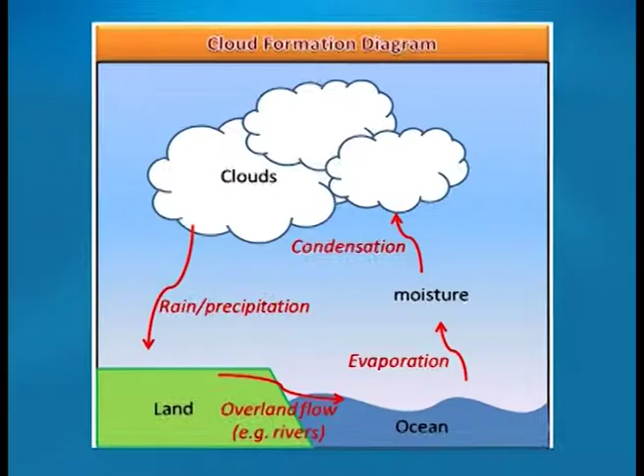Hydropower is a renewable energy resource because it uses the Earth's water cycle to generate electricity. Water evaporates from the Earth's surface, forms clouds, precipitates back to Earth, and flows towards the ocean. The movement of water as it flows downstream creates kinetic energy that can be converted into electricity.

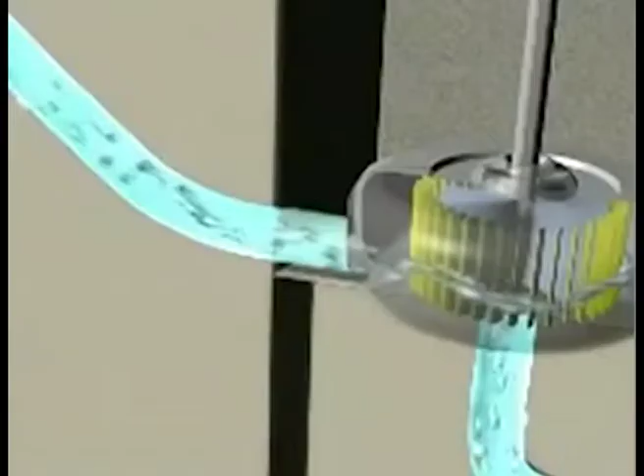On a worldwide standpoint, it is the most widely used form of renewable energy. Hydropower has been used for centuries by humans. The electricity is typically created when the water is passed over large mechanical turbines. The water pressure forces the turbines to turn. The mechanical energy created is then converted into electricity.

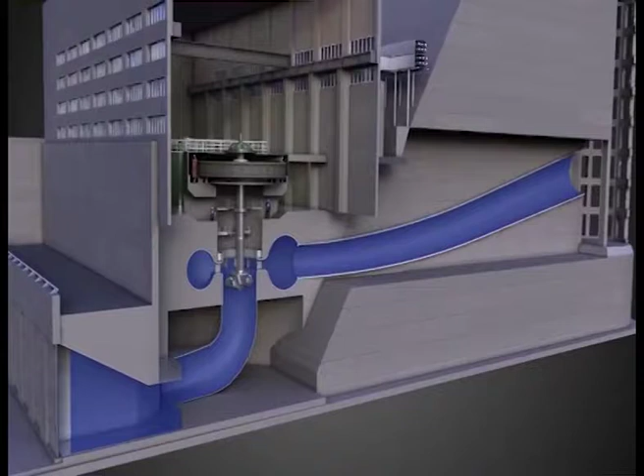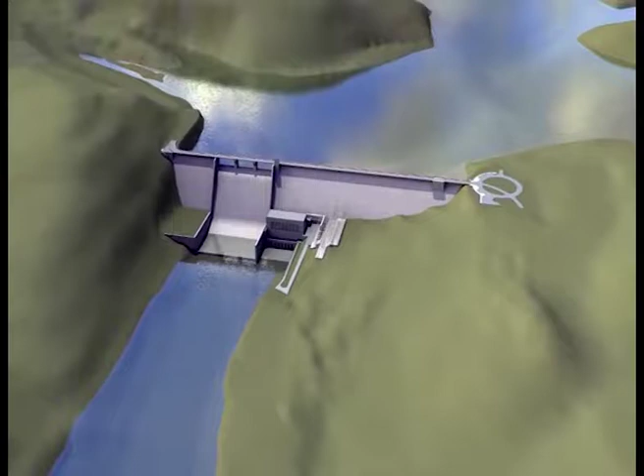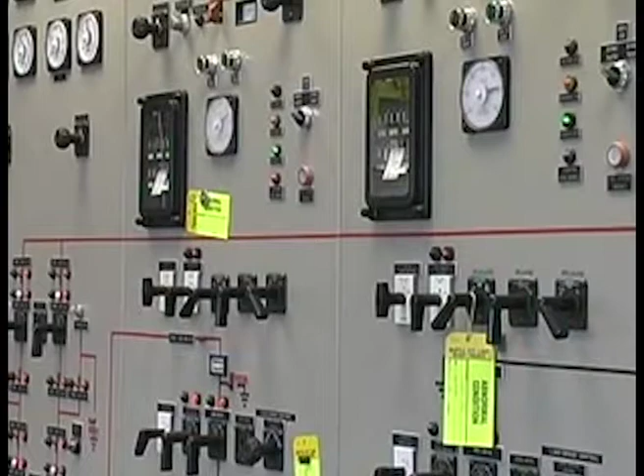Hydropower has now become the best source of electricity on Earth. History proves that the cost of this electricity remains constant over the years. Because of the many advantages, most countries now have hydropower as a major source of electricity. The government has taken a number of initiatives in recent years to improve the functioning of the power sector and attract investment. There has also been a special emphasis on accelerated hydropower development.

The following aspects are highlighted in this lesson. Future prospects of hydroelectric power in India. Advantages and disadvantages of hydroelectric power plant.

Policy, future plans. The National Electricity Policy (NEP) aimed to achieve the following by 2012. Per capita electricity available of 1000 units, installed capacity over 2 lakh megawatts, inter-region transmission capacity of 37,000 megawatts, spinning reserves of 5%, minimum lifeline consumption of 1 unit per household per day. Quality and reliable power.

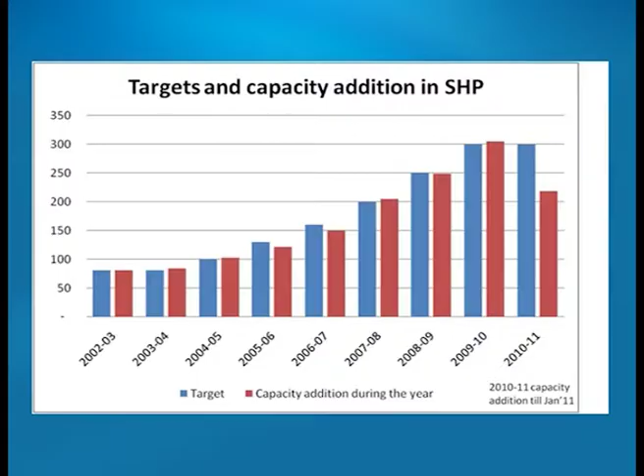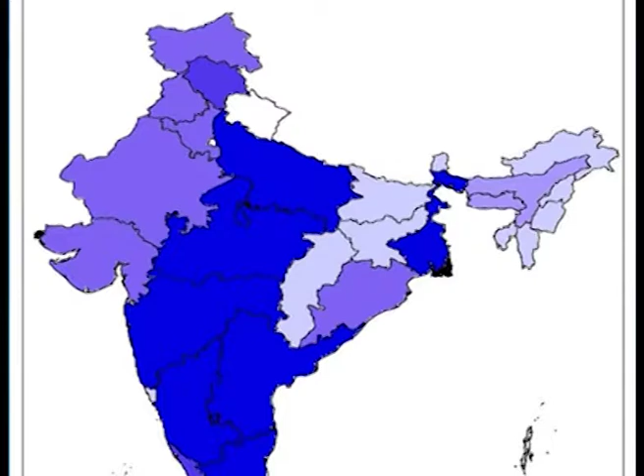Strategies for accelerated hydropower development. To name a few initiatives: policy liberalization, ranking of potential hydro sites, the Prime Minister's 50,000 megawatt hydroelectric initiative, streamlining of clearance procedures, institutional and budgetary support. The government has also taken a pragmatic view that in the immediate future, the public sector would have to play a dominant role in developing hydropower.

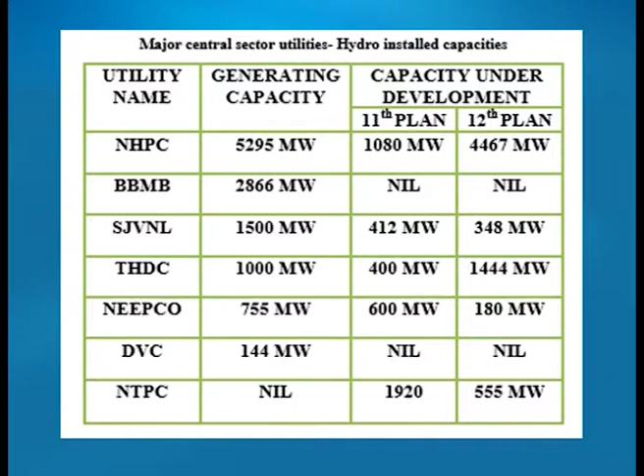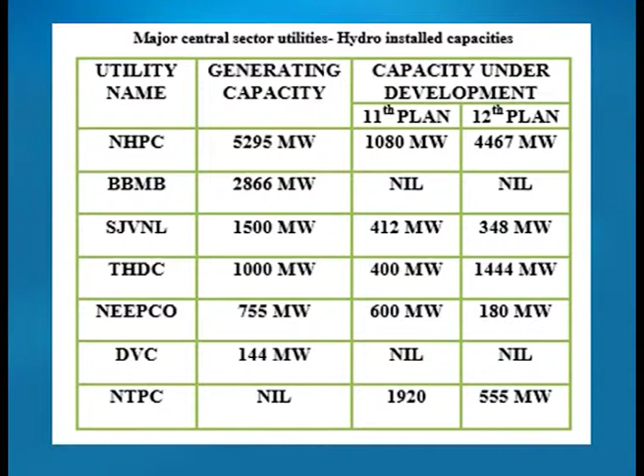A number of hydropower corporations have also been established in the central sector and in the joint sector, central and state. This includes the NHPC, North Eastern Electric Power Corporation (NEEPCO), Nathpa Jhakri Power Corporation (NJPC), now Satluj Jal Vidyut Nigam Limited (SJVNL), and Tehri Hydro Development Corporation (THDC). Besides, the National Thermal Power Corporation (NTPC) has been authorized to take up hydro projects.

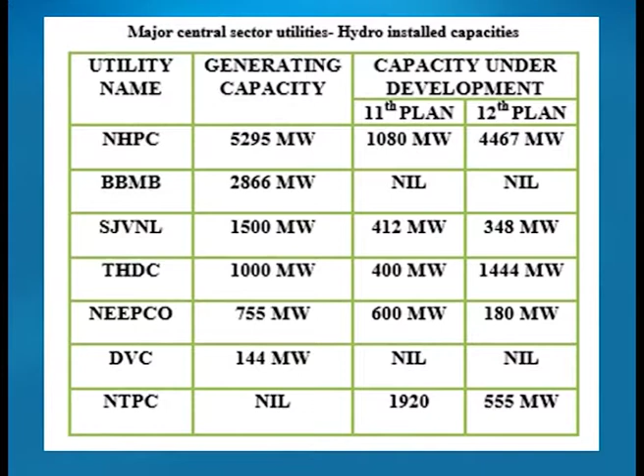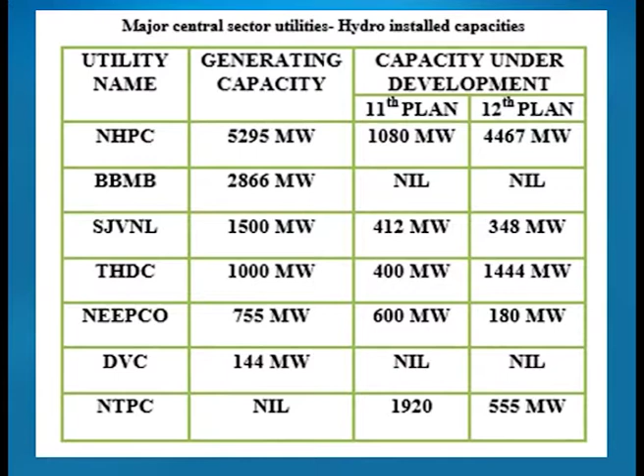Narmada Hydro Development Corporation (NHDC), a joint venture of the National Hydroelectric Power Corporation (NHPC) and the Government of Madhya Pradesh, has been constituted to implement the Indira Sagar 1000 megawatt and Omkareshwar 520 megawatt projects.

Status of water resources projects in India. In the Peninsula, hydro and water resources development is reasonably good. The Himalayan region has the bulk of the potential to be tapped. The Himalayas, being geologically young formations with frequent changes in rock conditions, are known for throwing up surprises. Geological surprises are one of the main causes of time and cost overrun and affect resources development.

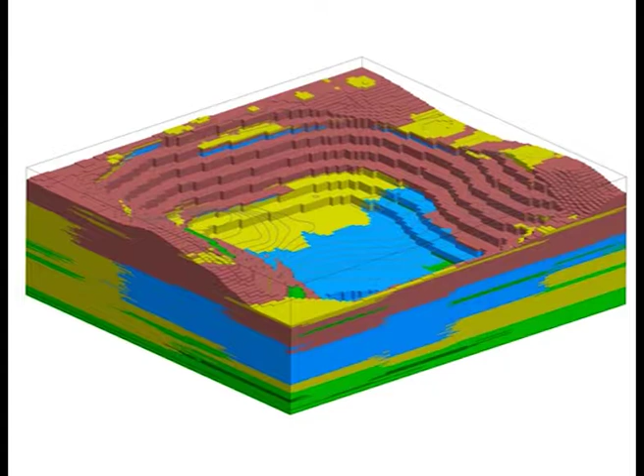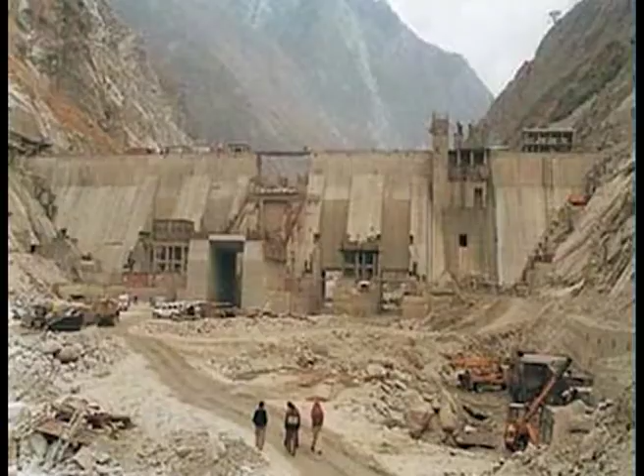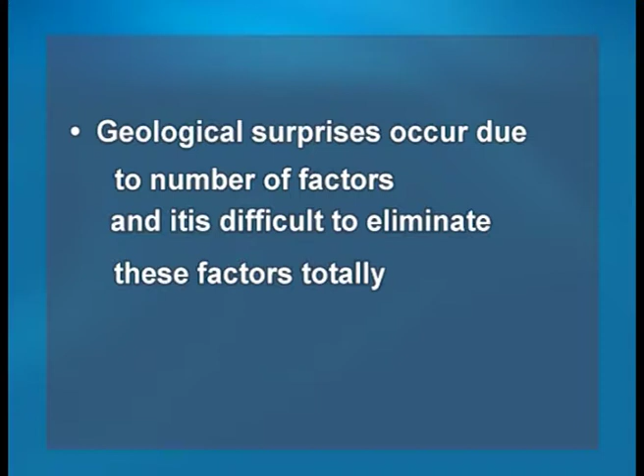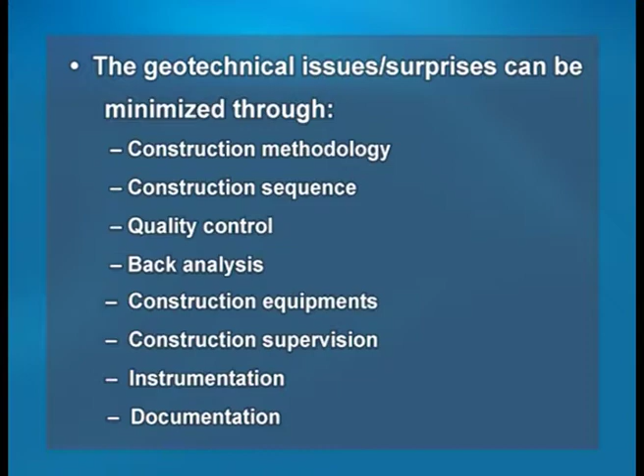Remedial measures to geotechnical issues. Geotechnical surprises occur due to a number of factors and it is difficult to eliminate these factors totally. However, this could be minimized by adopting suitable means during the planning stage, investigation stage, and design stage. The geotechnical issues or surprises can be minimized through construction methodology, construction equipment, construction sequence, construction supervision, quality control, instrumentation, back analysis, and documentation.

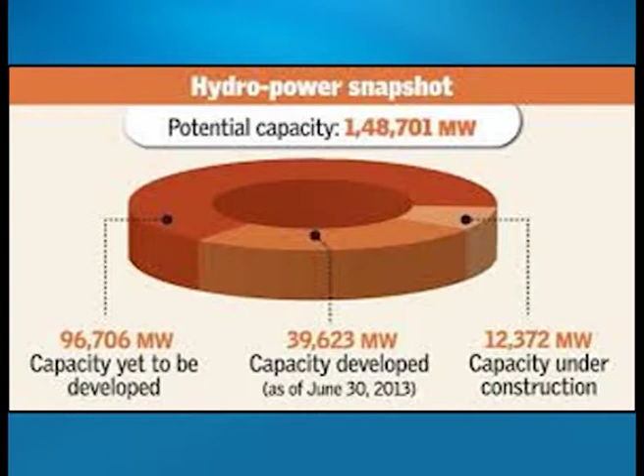Advantages. Hydropower is self-contained power with all its necessary elements inbound. It does not depend upon outside sources for supply of primary energy for consumption. India is blessed with an immense amount of hydroelectric potential and ranks 5th in terms of exploitable hydro potential on the global scenario. Hydropower potential is assessed at 1,48,700 megawatts, out of which the bulk potential is still to be harnessed. Pump storage potential is assessed at 93,920 megawatts.

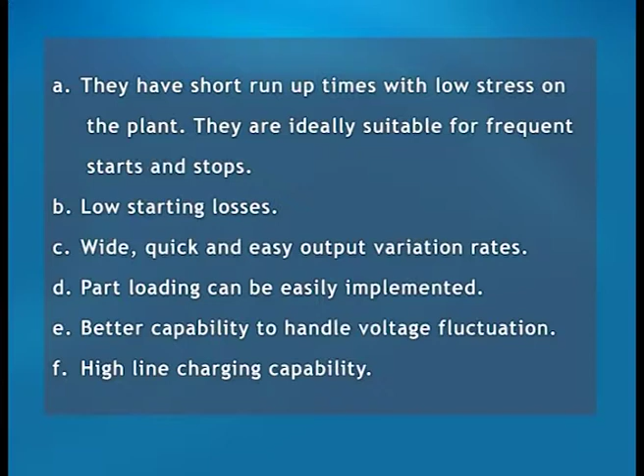Hydropower, due to its versatile operating characteristics and prominent technical features as mentioned below, is a favorable option. They have short run-up times with low stress on the plant. They are ideally suitable for frequent starts and stops. Low starting losses, wide, quick and easy output variation rates, part loading can be easily implemented, better capability to handle voltage fluctuation, high line charging capability.

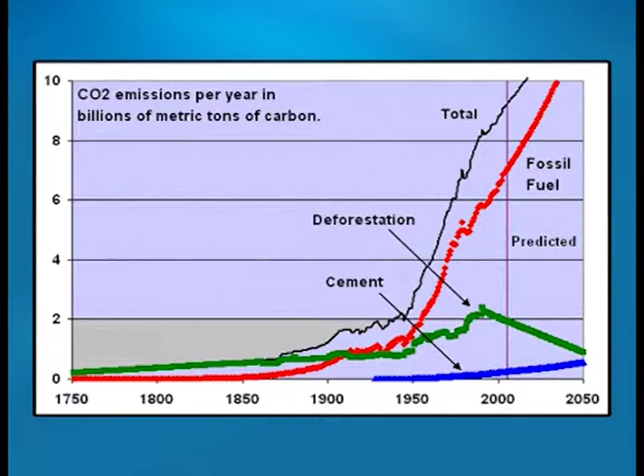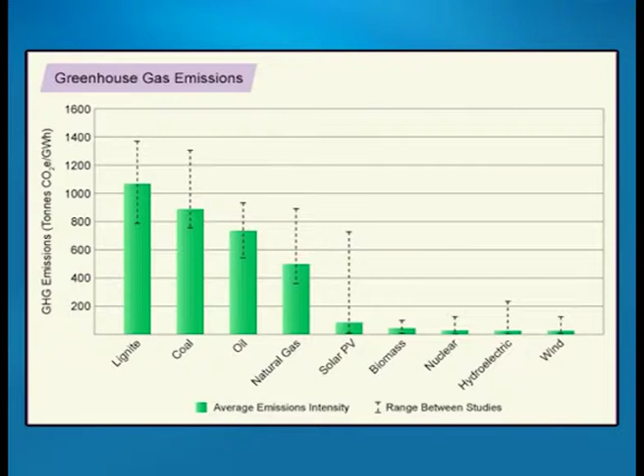Besides being inexhaustible, it is pollution free and non-inflammable in character. It helps in infrastructure development of remote and hilly areas. In this age of ozone depletion and global warming, we have to look up to hydropower as the energy source of the future. World over, the recent concern has been the increasing amount of CO2 in the Earth's atmosphere due to excessive burning of fossil fuels, and to curb this emission, we must switch over from fossil fuel based energy to clean hydropower.

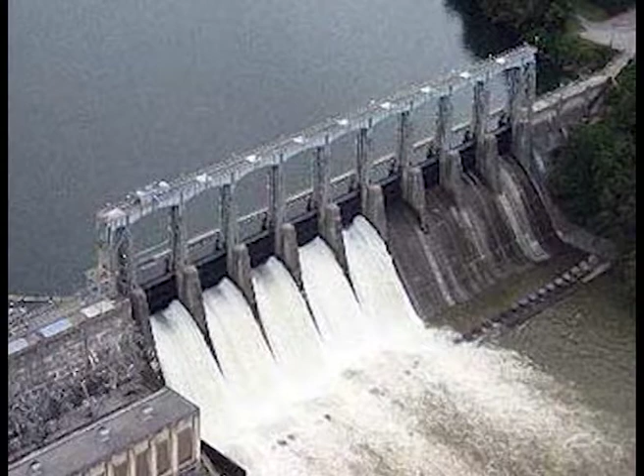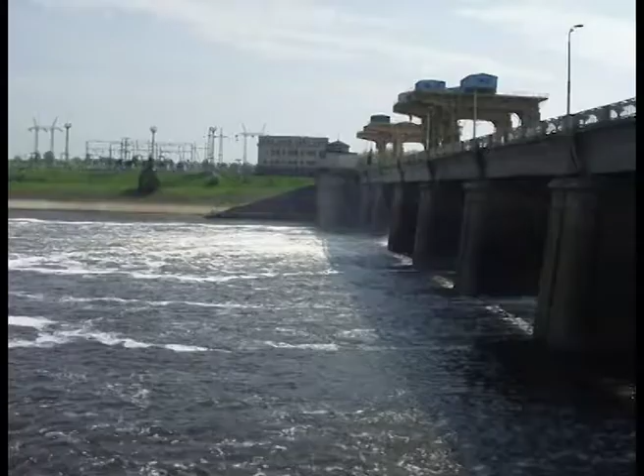There are several other technical advantages vis-a-vis other conventional forms of energy. Renewable source. Hydropower is a renewable source of energy, whereas for generation of 1000 GWh of electricity by a thermal station, 0.7 million tons of coal is required to be mined, transported and burned. It is a non-polluting source of energy with high conversion efficiency and does not contribute to the greenhouse effect, whereas for every billion units of thermal generation, 1 million tons of CO2 is released into the atmosphere.

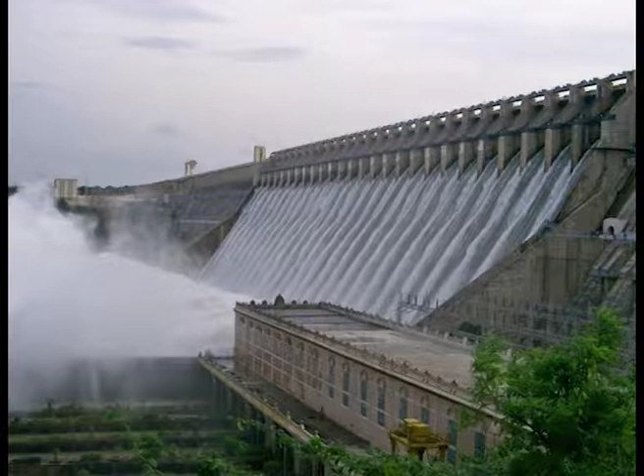Conversion efficiency of a thermal plant is also about 40% as against 85% for hydro, which means that for every 1 million units actually generated, 1.5 million units are being wasted.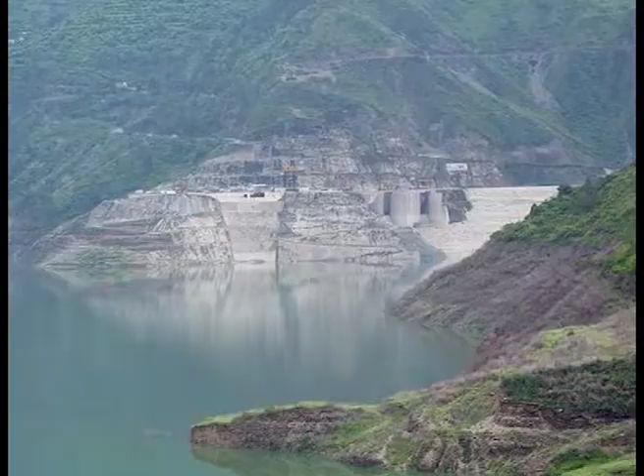Multipurposes. Storage type hydro projects provide additional benefits of flood control, irrigation, drinking and industrial water, navigation and tourism. The low temperature water from the reservoir can be provided to a thermal plant downstream for meeting its requirements. Cheap power. As compared with other sources, the generation cost of hydropower is quite less. Actually, it becomes cheaper with the passage of time.

Longer life. As compared to the life of 25 years of a thermal plant, the envisaged life of a hydro plant is 35 years. But in actual, the life of a hydro plant is much more, and with minimum renovation, the life of a hydro plant can be enhanced considerably.

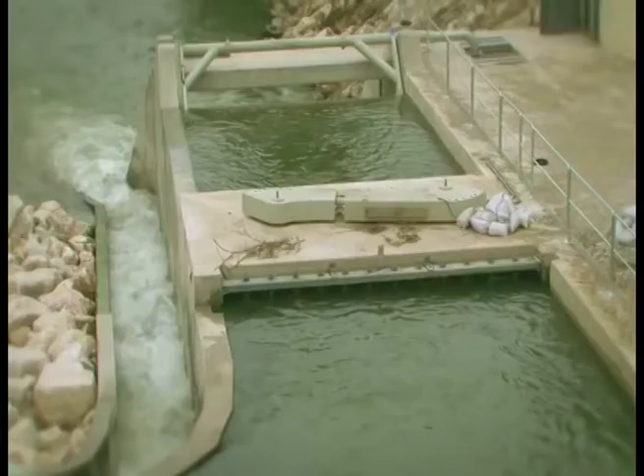Reliable source. As hydro plants can be started or synchronized and raised from no load to full load in minutes, they can pick up and drop loads as per the requirement of the system, and as their forced outages are rare and they require minimum maintenance, hydropower can be well described as a reliable source of energy.

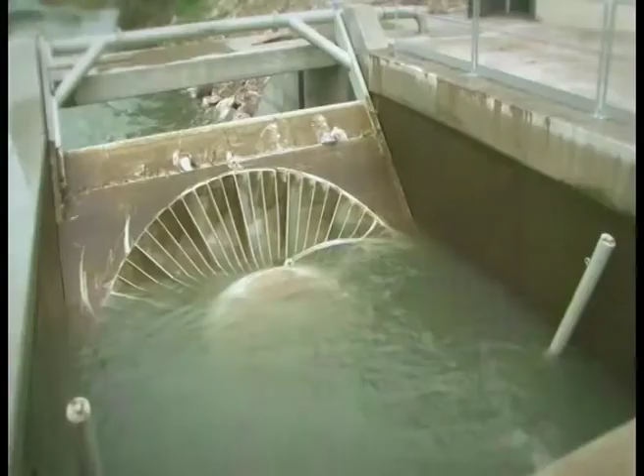The plant availability in the case of a hydro plant is generally of the order of 85%, and as compared to thermal, we can avail the same benefits and results if we set up hydro plants of capacity of 66% of the thermal capacity. Due to the above facts, hydro plants contribute substantially to overall system stability and reliability and result in optimal operation of the system.

Overall development. As hydro plants are located in difficult areas, their setting up improves road and rail linked communication. They provide employment and gear up the economy of that region.

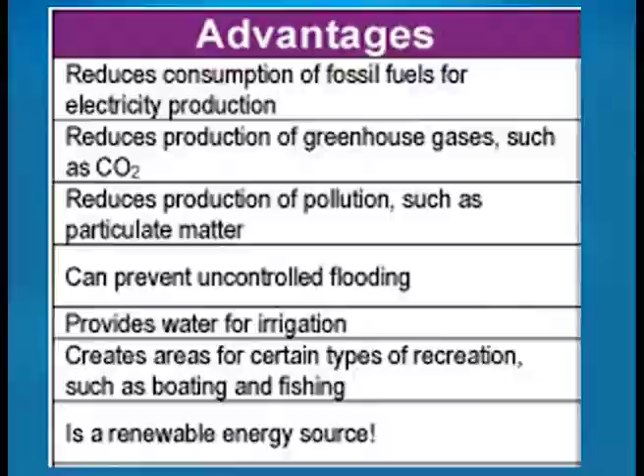Disadvantages of hydropower. There are many disadvantages of hydroelectric power, due to which it is not used on a very large scale all around the globe. Before employing something on the industrial level, you should consider its pros and cons. So, the disadvantages of hydropower are as follows. Emission of methane and carbon dioxide. The reservoir of water from hydroelectric power releases a large amount of carbon dioxide and methane.

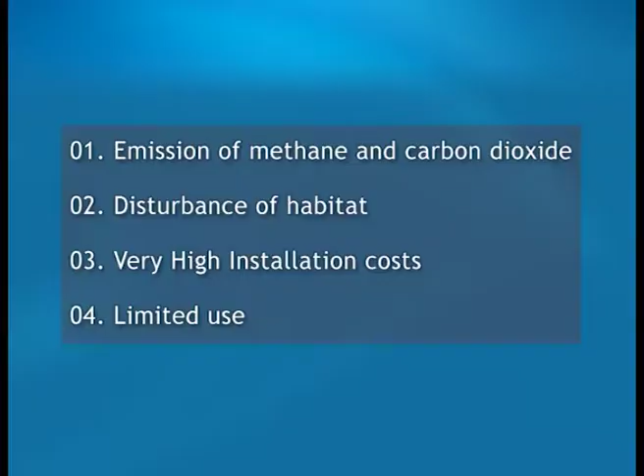Disturbance of habitat. The formation of large and huge dams destroys the living beings around them. Very high installation costs. Dams are extremely expensive to build and must be built to very high standards. Limited use. As hydroelectric power is produced by water, which depends on the yearly rainfall, only those areas can use this method which reserve a good amount of rainfall water, because this method needs a huge reservoir of water.

Divert natural waterway. Dams on rivers collect water for the production of electricity, which alters the natural system of water flows, thus depriving houses of the water they need. Effects on agriculture. Making dams on rivers affects the amount, quality and temperature of water that flows in streams, which has a drastic effect on agriculture and drinking water. Fish killing. The water, while flowing through the dam, collects nitrogen which can damage and also kill fish.

Disputes between people. Changing the river pathway and shortage of water can cause serious disputes between people. Breaking of dams. Many dams which were built for industrial use or for mills are not now used and are occupying a great place, but they can't be broken or removed as it would cause serious flooding. This would not only affect humans but also buildings and properties.

Deposition of silt. Dams prevent seasonal floods and allow silt and vegetation to clog up river backwaters. This causes changes to the environment which may impact plant and animal habitats. Changes in reservoir and stream water quality. Building a large dam alters the natural water table level. This is slowly leading to damage of many ancient monuments, as salts and destructive minerals are deposited in the stonework from rising damp caused by the changing water table level.

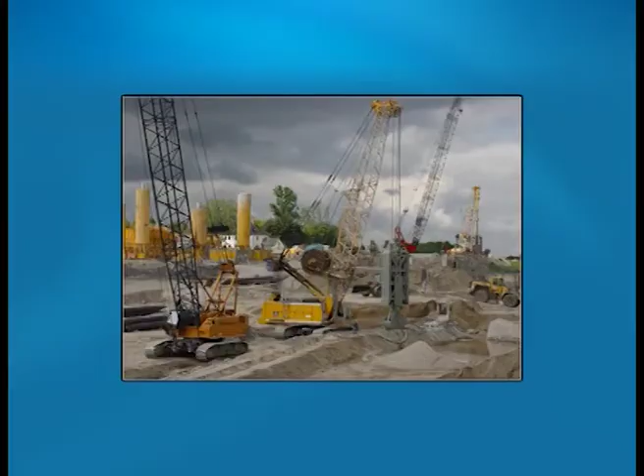The second area of rampant neglect was drainage. The road engineers had no provisions for draining out all rainwater that can possibly enter the stretch. Where 1 to 2 meter bridges are required, they build small culverts at places where drains have been provided for. They were usually filled with debris. Buildings have been constructed over old drains and streams, blocking the natural pathway of rainwater.

One of the reasons for the devastation at Kedarnath was that people had constructed houses on the west stream of the Mandakini river that had been dry for decades. When the river returned to its old course following the deluge, these constructions were washed away.

Another type of transgression, similar to the previous one, was construction taking place on river floodways. A floodway is the area covered by the river at the time of its biggest flooding in the past 100 years. Constructions have taken place on the lower terraces which were part of the floodway. Sooner or later, water would get to these places.

Lastly, roads have been built over the debris of previous landslides, as it is costlier to build paths higher up in the hills where the rock is firmer. Because authorities do not pay attention to basic scientific principles, the state pays with human lives and huge property losses.

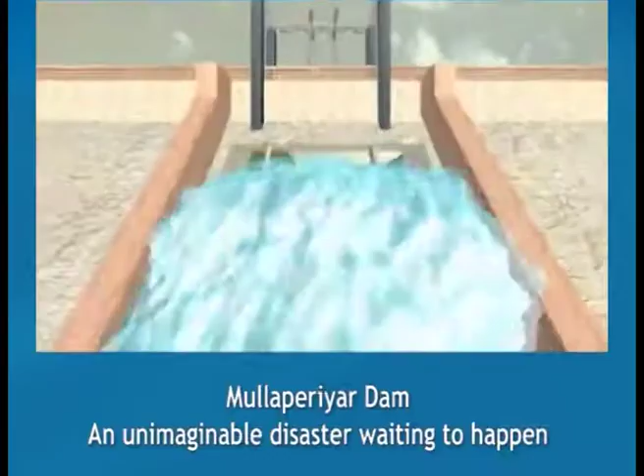The Mullaperiyar Dam is a masonry gravity dam built over the river Periyar in 1895 during the British colonial rule, with a predicted lifespan of 50 years, to divert water eastwards towards the Madras Presidency area, present-day Tamil Nadu. The diverted water from the dam is used for irrigation in Sivaganga, Theni, Madurai and Ramanathapuram districts. The Periyar power station in Tamil Nadu produces hydroelectric power from these waters and distributes that electricity in Tamil Nadu.

In 1979, there were a few minor earthquakes experienced in the region surrounding the dam, following which safety concerns were raised over the dam. Since then, both states, Kerala and Tamil Nadu, have been at loggerheads with each other on the issue. A state agency had reported that the dam will not withstand an earthquake above magnitude 6 on the Richter scale.

Now getting into the controversial part, the catchment areas and river basin downstream include 5 major districts of central Kerala: Idukki, Ernakulam, Kottayam, Alappuzha and Thrissur, which have a total population of 3.5 million people. Experts had mentioned that the structure will not withstand an earthquake and is under serious threat. After all these reminders and 32 years of legal battle, both parties have not reached a consensus on this issue.

Even after the Kerala government's promise to give water and a new dam, undertaking all the expenses, subsequent Tamil Nadu governments have turned a blind eye towards any suggestion or negotiation by Kerala. The reasons raised by Tamil Nadu are water scarcity in 5 districts of Tamil Nadu, which will lead to drought in the region. A valid reason. In response to this, the Kerala government has promised to deliver the same amount of water to Tamil Nadu without fail.

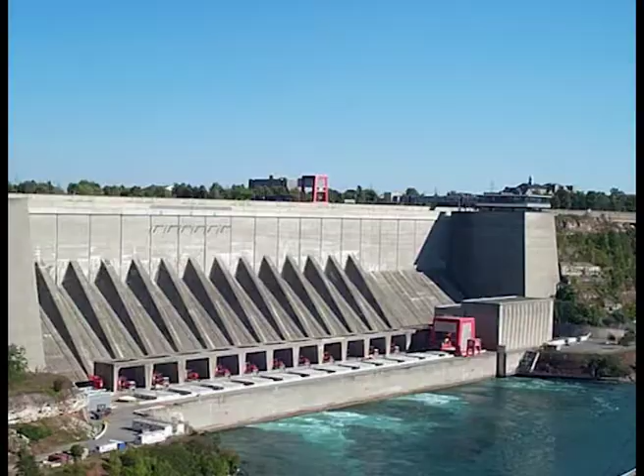Summary: the Indian power system has not been developed in the required manner and needs hydropower potential development on a fast-track basis. The exorbitant fund requirement to meet the gigantic challenge cannot be met with the budgetary support of centre or state governments. Cooperation between government and the private sector is essentially required to develop projects in a time-bound manner.

To facilitate smooth execution of the project, it is necessary that government policy should be such that the private sector finds an easy approach in handling development of hydro sites, since for individual developers, tackling various agencies for seeking clearance or information would be difficult. The need has been recognized for accelerated hydropower development in India. 80% of the existing hydro potential is still unharnessed.

Hydropower projects are still in a state of evolution, with the process proving to be slow and expensive. Small projects will continue to be developed, but there is a danger that interest will falter in the larger projects if prospective developers continue to be faced with high upfront costs and long gestation periods with only limited prospects of success.